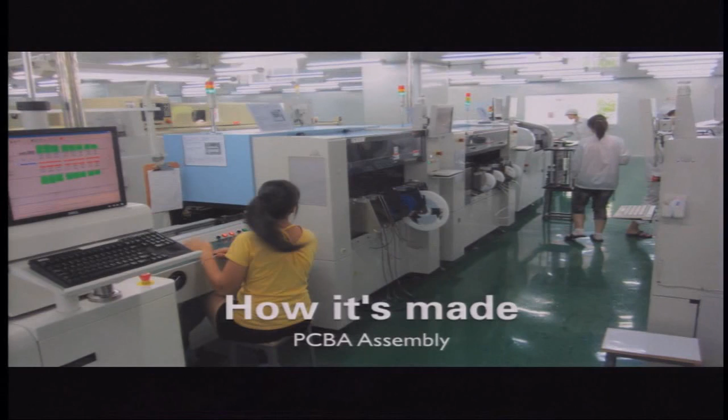So let me show you this. The very first thing we do is make our PCBs. You start by covering your PCBs with solder paste. This is an SMT machine that can automatically pick and place all of the components—the wireless chips, resistors, capacitors. After the components are placed, they'll be passed through an oven.

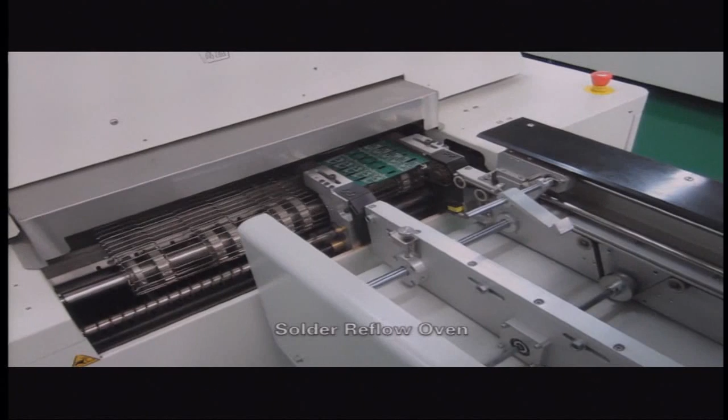Not every component on the board can be automatically placed, so we actually have to hand solder a few different things. In that case, that was our encoders for the motors.

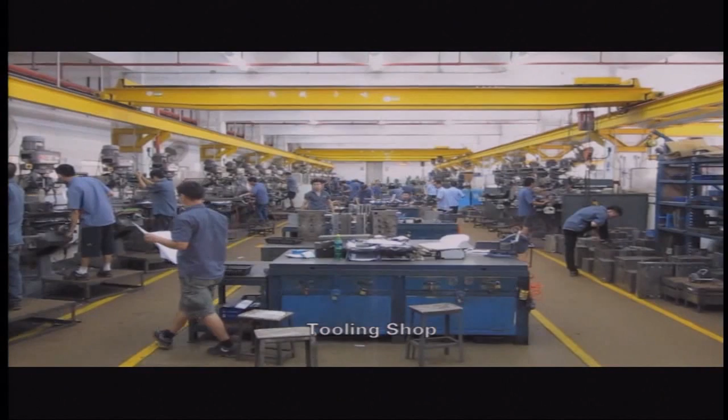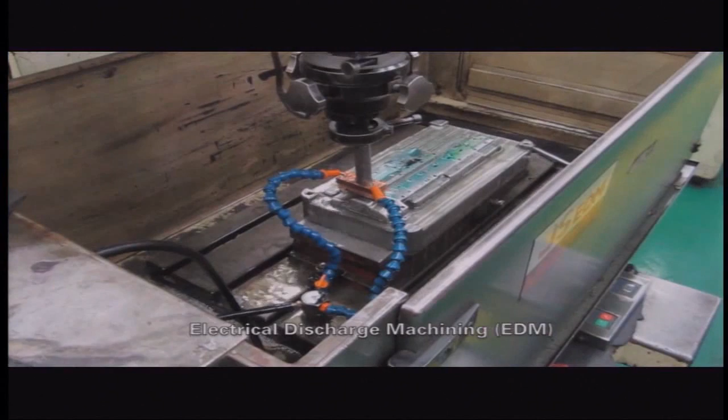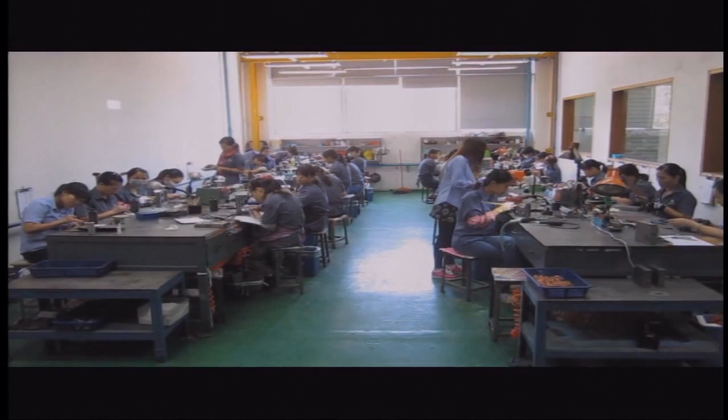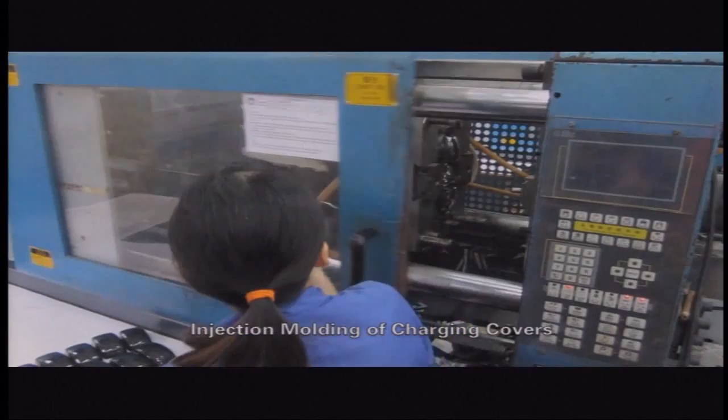These are tools. We use tools to do all the injection molding of our plastics. You create these tools usually by CNC machining or using an EDM process on some of the tougher materials. You carve these molds typically out of hardened steel, and there's also a lot of hand polishing that goes into that. Once you have the molds, you can put them in a very, very high pressure injection molding machine. In this case, these are little charging covers for the vehicles.

This is our tires—you'll see the tires pop out here. These are multi-cavity tools, so you see there was about 8 that popped out.

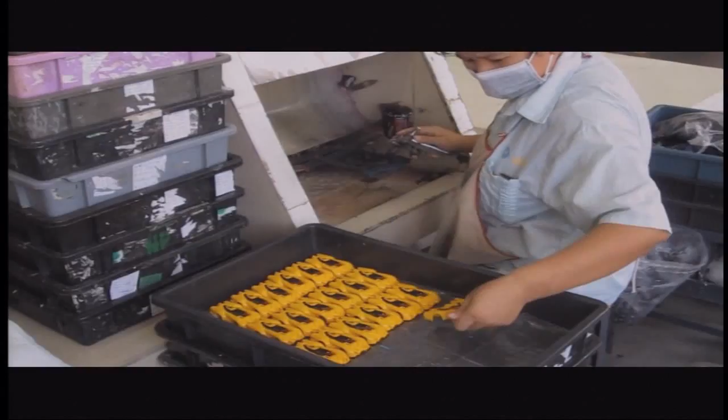This is an assembly line for one car. There are 45 different paint steps for each of these vehicles. We paint every one by hand. Now the assembly line, once again, there's about 45 people on this line. We've had to design all of these individual test fixtures and assembly fixtures.

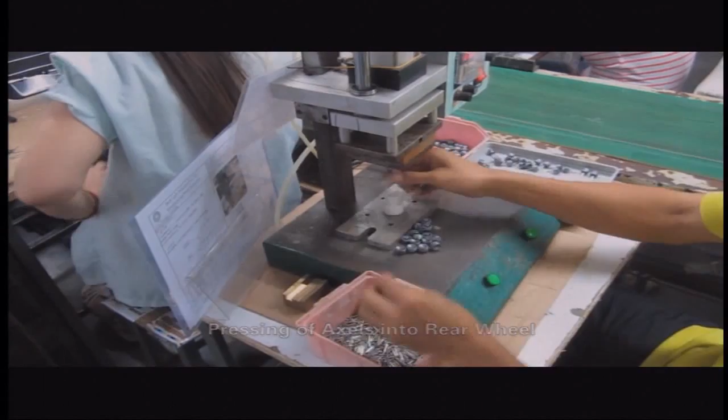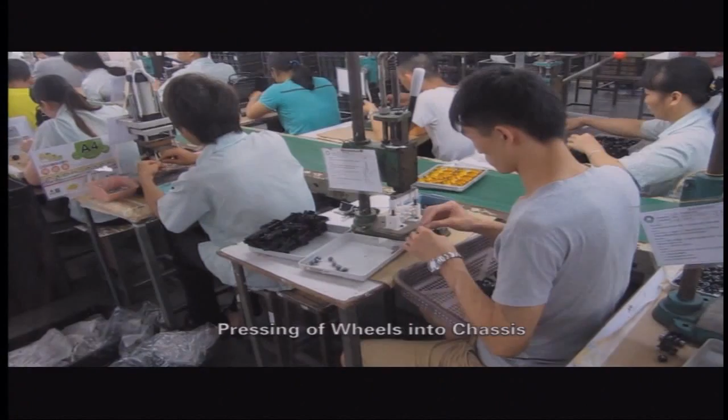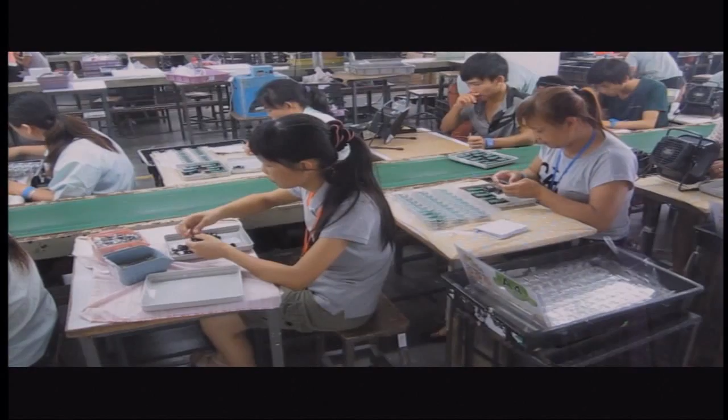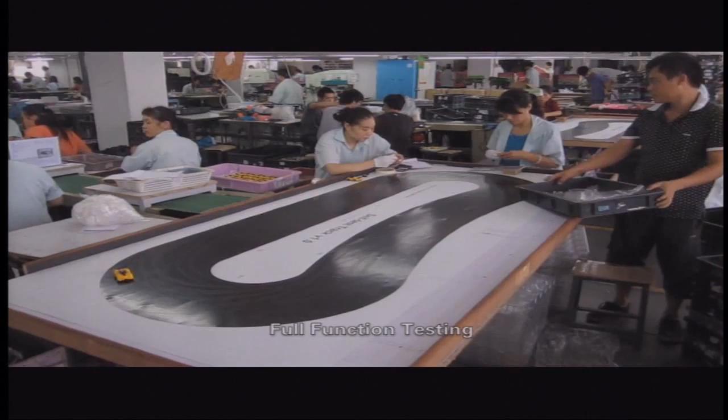Now imagine that there is error that can occur at every single step. So in mass production, largely what you're doing is variance control—your error can propagate over time. So you have to make sure there are constant test steps along the way. Any one of these things is a failure point. And one of the things we do is functional testing: at the end of our production line, we have every single car driving.

It's very, very important to know what date your robot was manufactured and what production line it came from, in case there are problems that come up in the field. You can then trace it back, and we collect a lot of data, so if there's a failure, we can figure out what's going on.

This is the final pack out, and then everything's put into boxes. Those boxes go into crates. The crates go into shipping containers. The shipping containers get sent overseas into the U.S. We bring them in and put them into our distribution center, and then they go to physical retail stores.

Very excited that after many, many years of work, Anki Drive will be available in a few short weeks in all of the Apple retail stores in North America.

So let me share with you a couple of lessons I've learned in the last few years. Mass production is definitely hard. Just watching that, you can see it takes 100 people to make what looks like a pretty simple vehicle.

So the bad news is that it costs a lot more than you think. You might carve a mold for a tool, and then you realize that your tolerances are off, and then you have to throw it out and potentially start again. There's so many things that pop up, and you're constantly finding errors you have to track down.

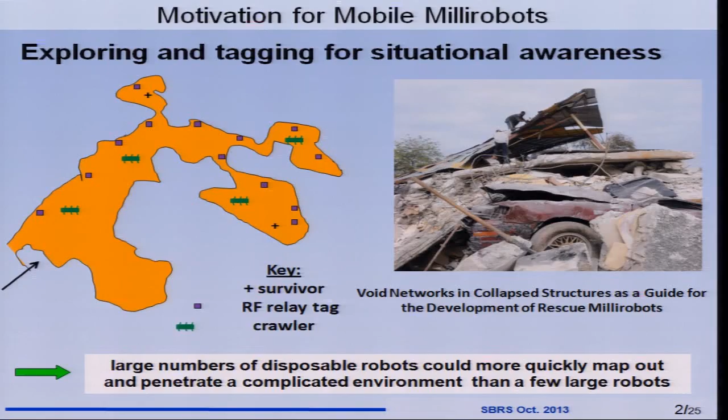So we're motivated by making very, very small robots that will be highly agile and able to go into really complicated terrain that big robots can't go into, and we want to make them very cheap and disposable. So in case they fail in their mission, we're not going to worry about it because they're going to be disposable.

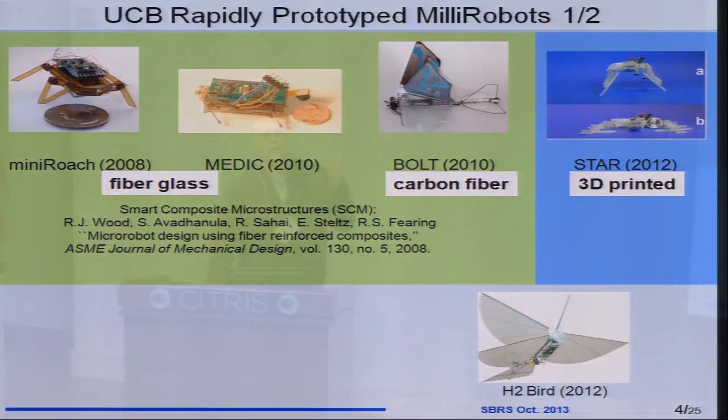So I'll show you some of the things we're doing. We've got a lot of work in production engineering to be able to make these small robots. I'll go briefly over how we make them. Make them fiberglass, carbon fiber, fiberboard. Typically in the size range here, they're palm size now, thumb size to palm size. A bunch of crawling robots and flying robots. I'll tell you about those.

Okay, so we started. One of our first crawling robots was this 2.4 gram crawler. This is made of laser cut fiberglass, folded together. At the time, it was one of the smallest legged autonomous robots. Got kind of limited capability running with shape memory alloy.

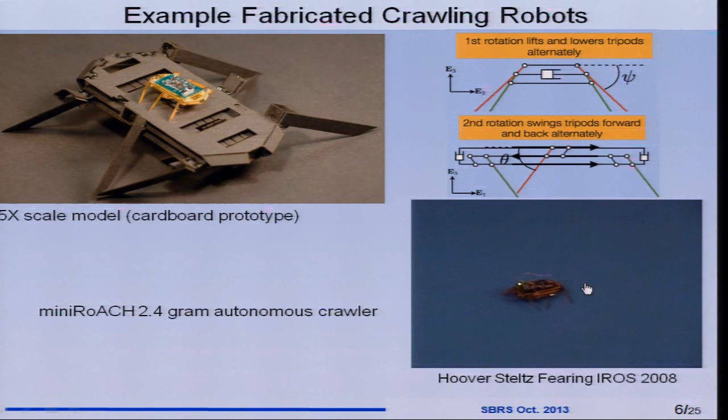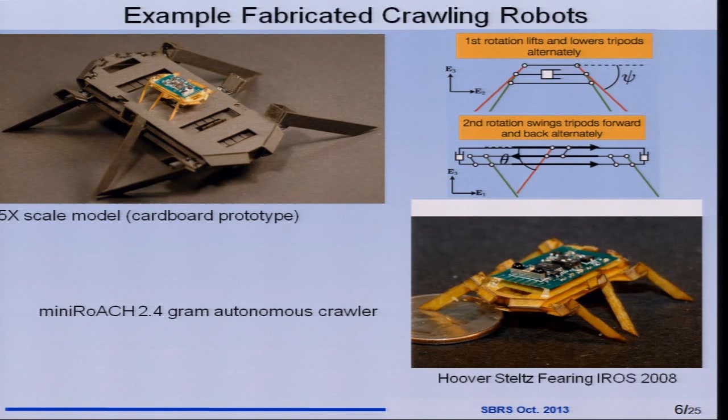We've kind of moved on to higher performance machines, going up a little bit larger. But I would say one of the interesting things here, you can see that the scale, just by changing a design parameter, maybe changing material, this design scales an order of magnitude pretty easily. Probably goes from a size range of about a tenth of a gram up to 100 grams. So pretty good size range, about 3 orders of magnitude in weight.

Still working on that. I want to check that out. Okay.

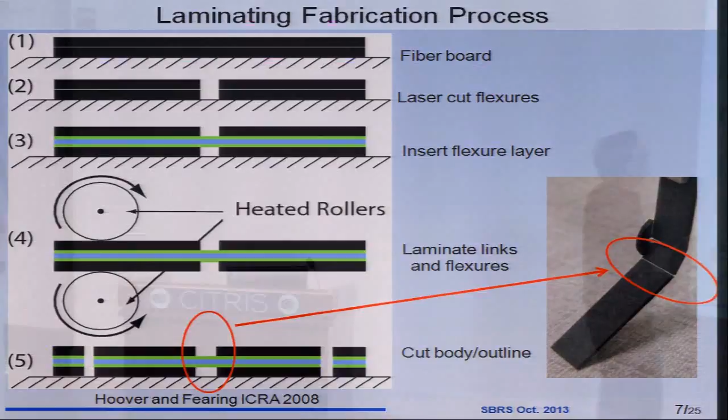So probably didn't hear anything I said, but you saw the pictures. Okay, so our process is actually pretty simple. We take a laminated process and laser cut. The laser cuts form a joint. The manufacturing is the easy part. Actually, the design is the hard part. That's still a pretty interesting open question. How you go from a conceptual design like this to a full design like this.

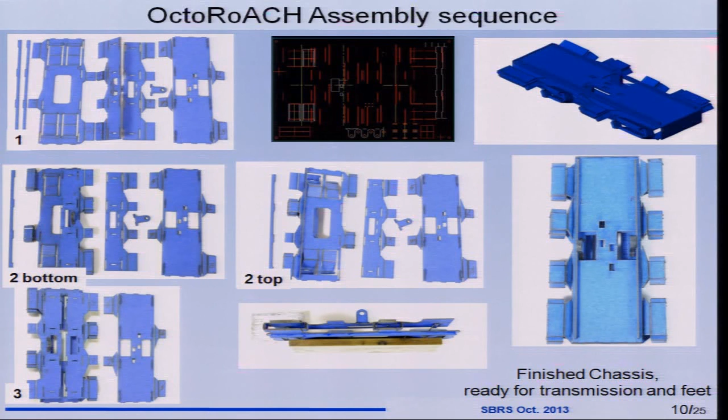This is Andrew Pullin's robot, and it's done with basically a flat planar layout. You get these parts that are laser cut. They incorporate both the joints and the structure, and this goes through the process here. Here's the full design, starting with the various pieces of the chassis, top and bottom. They're folded, combined together, and finally you end up with a complete chassis. And there's your robot. This is a robot minimally actuated, one motor for the left side, one for the right side.

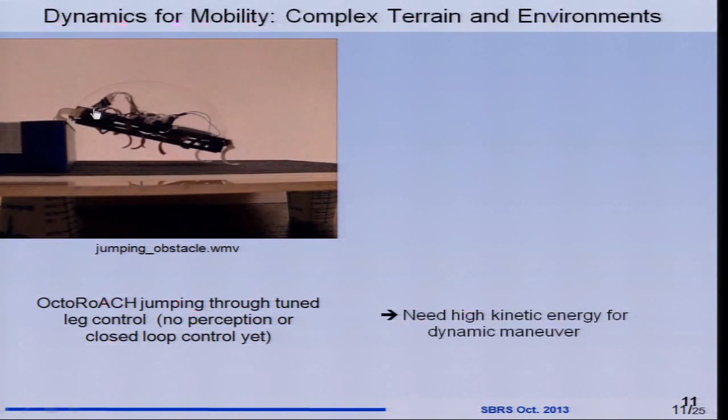It's not the most complicated robot, but we start to see you can get some pretty interesting behavior out of it. They've got a very high power to weight ratio because they're a very lightweight structure, and because it's minimally actuated, most of the time the motors are running, they're providing useful work for you, and so it can be pretty dynamic. So we think the dynamics is going to be really interesting for these small robots to give them mobility, and it'll get there.

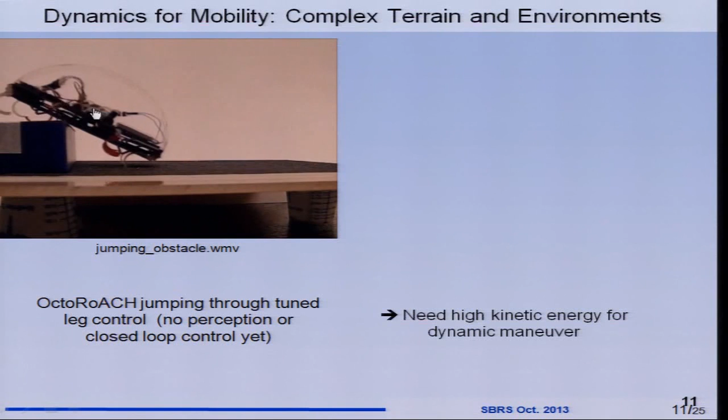It'll get there. Okay. Well, it really wants to get up there. Okay, there you go. There you go. So it made it. Oh, that's some problem at the other side, but it got up there.

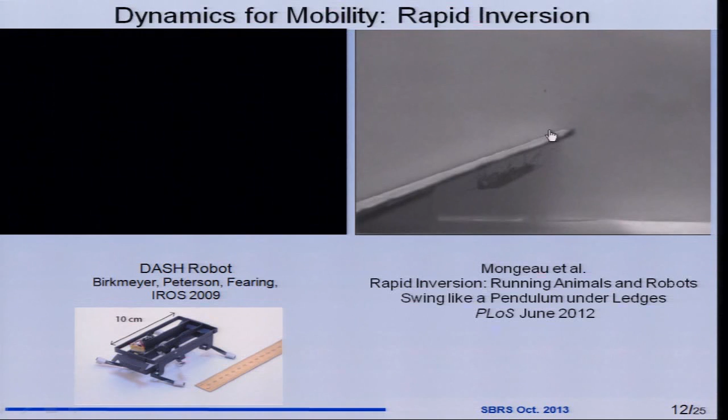So we're really inspired by the amazing capabilities of animals. Worked very closely with Bob Full. The example here is a really interesting escape behavior. The animal gets to the end of this ledge, and it just swings around, uses its kinetic energy to carry it through. And so we're really interested in, well, how do we understand that, and how do we capture that?

And we can do similar things with our robots. They just catch at the end, and the forward momentum causes them to rotate around. Okay, so dynamics is really important. We think the more dynamics, the better.

But you have to worry about sometimes things get too dynamic—how do you control all this energy you're putting into the system? Here we've got a robot with a roll instability, so the control issue has to come in. One way to take care of this is with a wing structure.

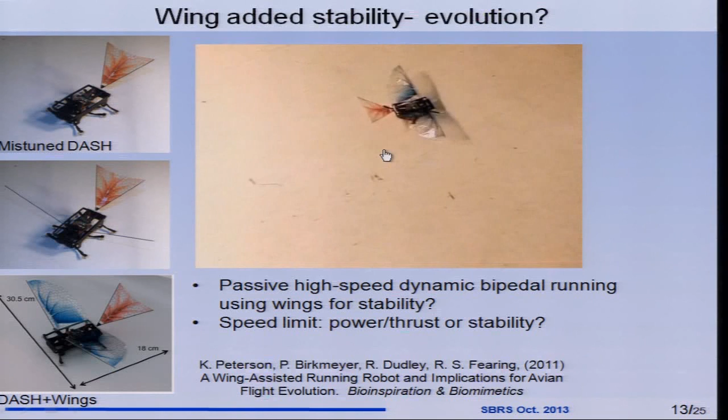The wings are providing both forward thrust and some damping moment. The wings don't actually need to be moving, because as the robot is running fast enough, it's generating its own drag forces, and these drag forces provide stabilization. You can see here in Duncan Haldane's Velociroach robot, these passive wings on the side aren't moving, but they're providing a stabilization drag.

The speed on this robot was limited by the stability. Without the damping of the wings, it would roll over like you saw on the previous slide. But this robot will run at 2.7 meters a second, and until last week we were tied for second fastest legged robot, but now we've slipped to third because of the Wildcat. So this is the third fastest legged robot in absolute terms at 2.7 meters a second.

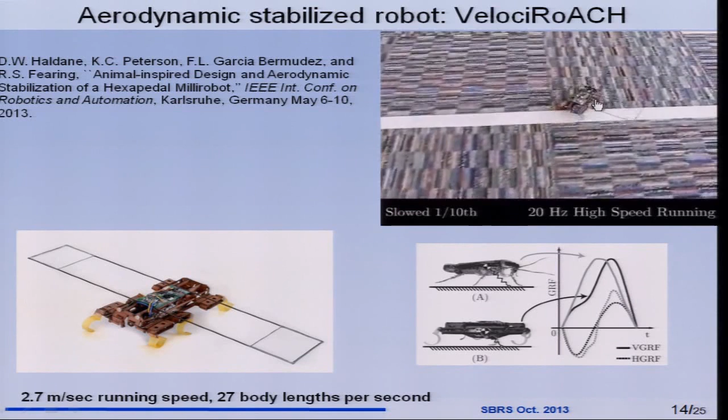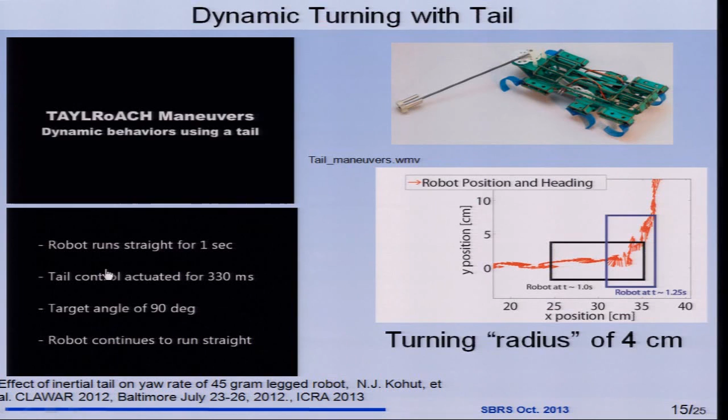Okay, so that's running—running's an important capability. We also want to be able to maneuver. Maneuverability is going to be limited by the traction forces you can get with your feet. If you're trying to run on ice or other slippery surfaces, it's going to be really hard to turn.

How many minutes do I have left? Three minutes. Okay, we're in good shape there.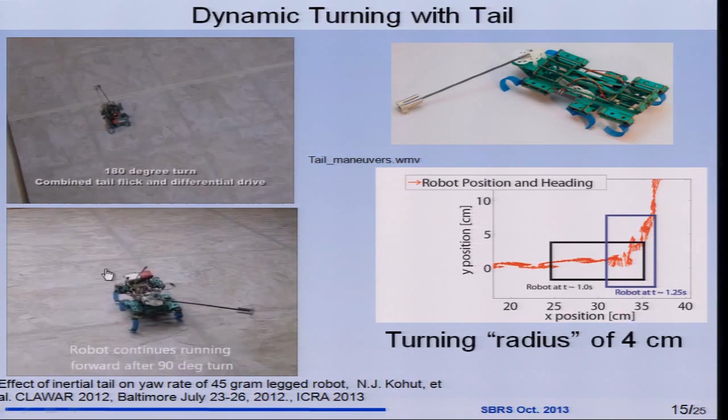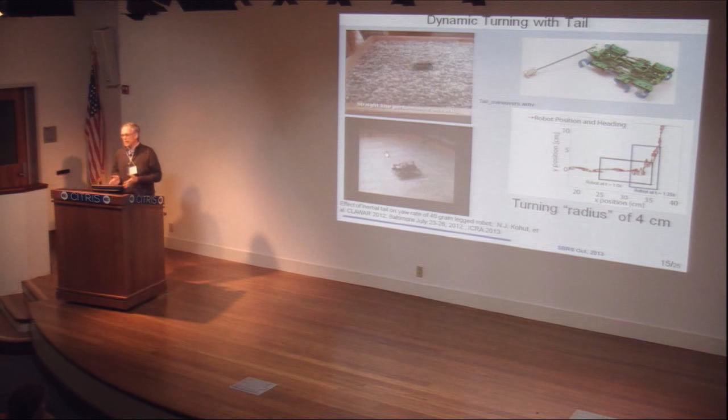One way to get really high turning moments is to put a tail on the robot and use the dynamics and inertial forces generated by the tail to get the rotation. This is work by Nick, who's now working with Mark Cutkosky at Stanford. You can see we get a turning radius now of 4 centimeters. If you looked at the traction forces required on the ground to cause that turn to happen at that speed, it wouldn't happen—so it's being caused by the tail.

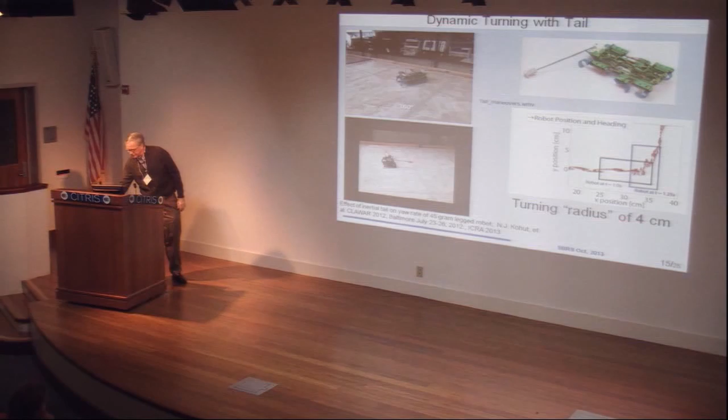And you can put a servo around the tail so you can stabilize it with a gyro and control your heading.

Coming back to aerodynamics—we can turn with inertia forces, but you can also turn with aerodynamic forces. Nick's going to present this at IROS next month. It's running, and the tail is going from one side to the other, and there's enough drag force generated by that tail to cause it to rotate one side or the other. We also did the control case where if you take the tail with no aerodynamic surface on it, it won't turn anywhere near as well. So it's turning by just the rudder effect of the tail.

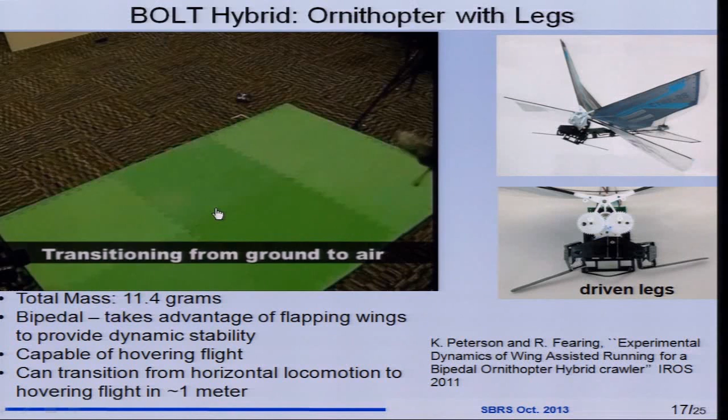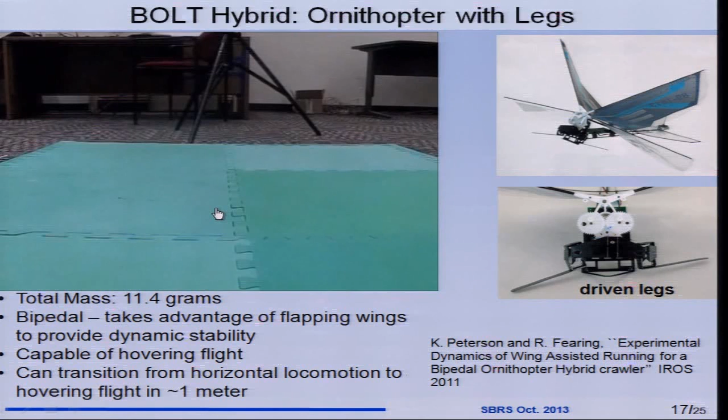Flying is very expensive—it takes a lot of power. So if you've got the opportunity to use your legs, that'll be more efficient and give you better endurance. Sometimes you have big obstacles though, so you need to be able to climb up with the wings.

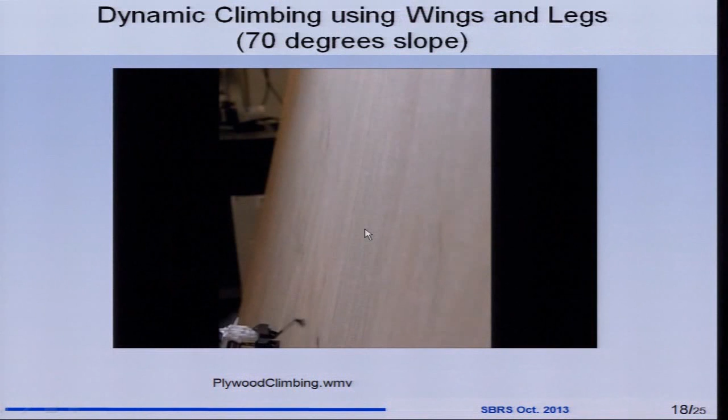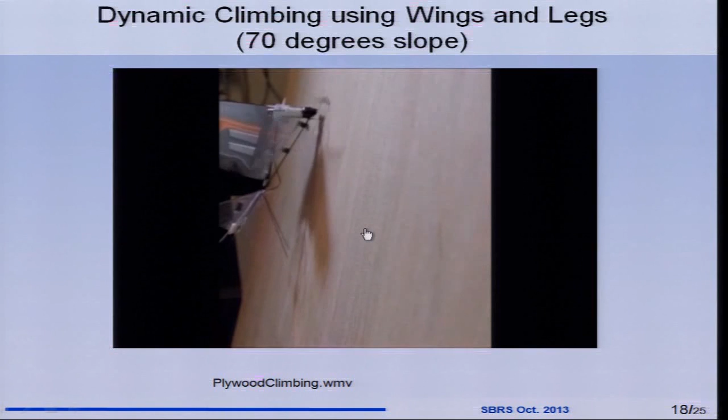Here, coming up a 70-degree slope, if you look closely in the picture there, you'll see that normally when you're running along on the ground, you don't lose contact with the ground. But here, running up the wall, you lose contact, and the wings will force you back into the wall so you can maintain the running.

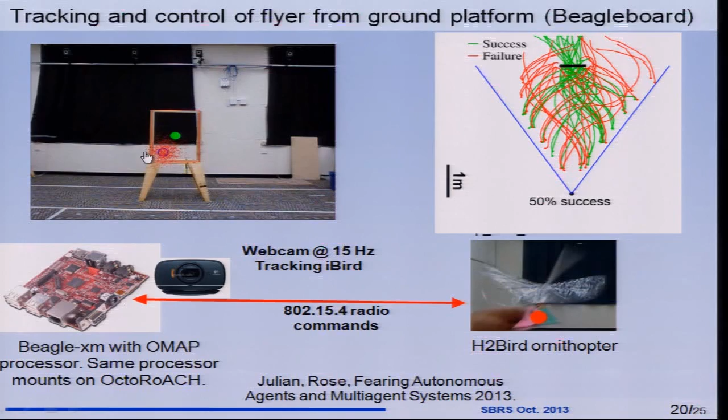Okay, running out of time. One of the things we're interested in is multiple robot control, so you can distribute the intelligence among the different robots. The flying robots are about 13 grams—they really, even today, can't carry much processing capability, mainly because of the power requirement. So you can distribute the intelligence and have one mobile robot that's looking at the flying robot and telling it where to go.

Okay, back to climbing. We're very interested in this concept of all-terrain mobility—something as capable as an animal is of climbing, whether it's a floor, a wall, or a ceiling. To do that, we have to understand how we adhere to surfaces. So we've got a lot of interest in understanding adhesion, again working with Bob Full on coming up with ways to build adhesive mechanisms that run at very high speeds.

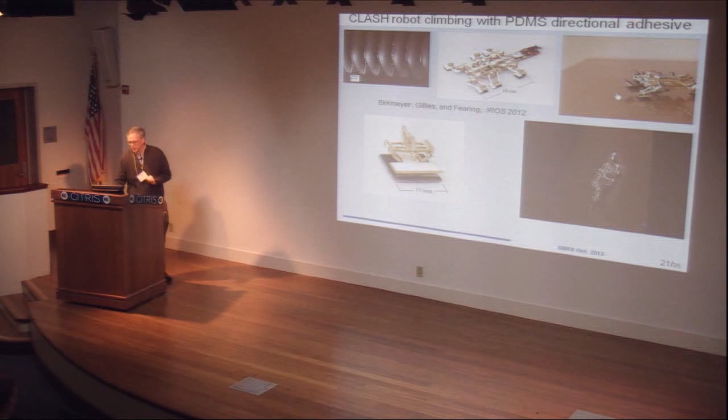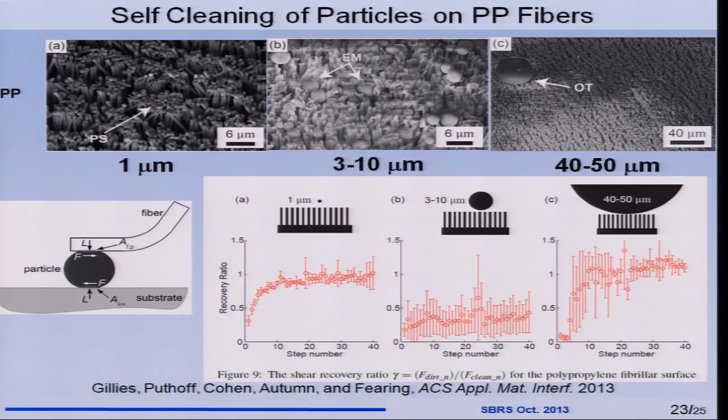These legs are going at about 20 hertz, and we want to be able to work in dirty environments—that's actually the limitation. There are a lot of great adhesives out there, but how do you climb in a normal environment where it's covered with dirt? The typical adhesive material is very soft, and it gets all cluttered with dirt. So we're working on special new types of adhesives.

Polymers, they get dirty. After you take steps, they clean up. So, in conclusion, this is where I want to be able to build a robot that's as capable as a squirrel, to keep us busy for the next 20 years.

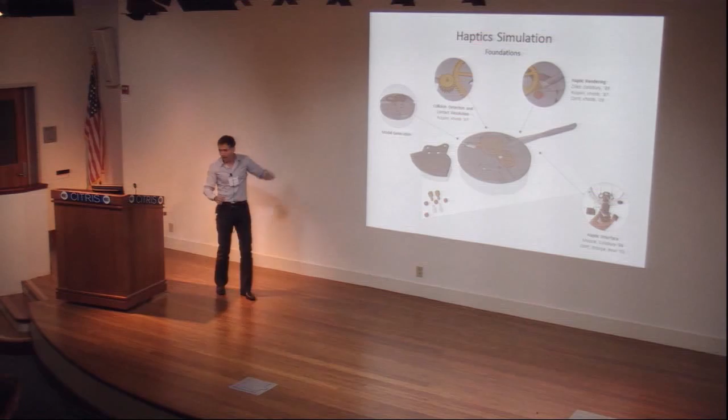We're very interested in taking those parts and having them interact together, collide, not just penetrate or intersect. This means looking at collision and possibly adding some dynamics. The haptics idea is to take those parts using a haptic device—a small robot that can recreate forces in your hand—and control the different parts in the environment, as if doing a virtual assembly.

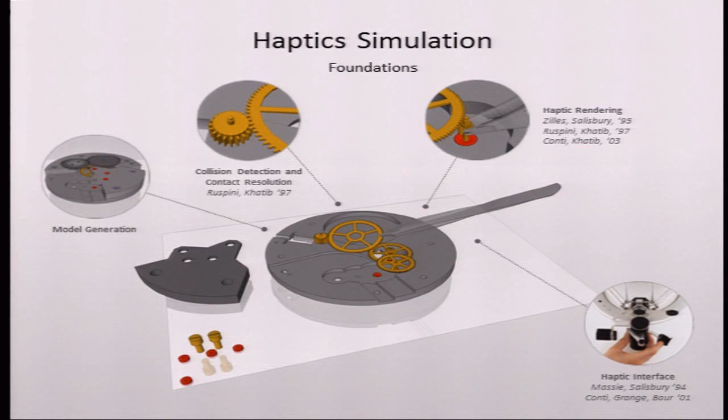From there, what I want to show you is: if you want to create a simulation like this, what do you actually need? Some of the work has focused a lot on haptic devices.

Going back, if you want to look at when haptic devices really started, we can go back to the 50s, when we began building telemanipulators. But it's much later, in the 90s, when Silicon Graphics came up with computers that allowed us to do 3D computer animation and 3D imaging, that we could really start to combine haptics with simulation. The devices have improved a lot in recent years.

We no longer just do point contact haptics, where you take a finger and touch a surface. We now have the ability to feel torques, forces in rotation, forces in translation, and even grasping. This opens up some interesting capabilities, where we now have to revisit the whole haptic simulation framework.

What are the algorithms we're going to use? It's not just single point contact—we want to take complicated parts and bring them into contact together. This means we'll have not one, but tens or hundreds of contact points, so we'll have to come up with ways to very efficiently compute those forces.

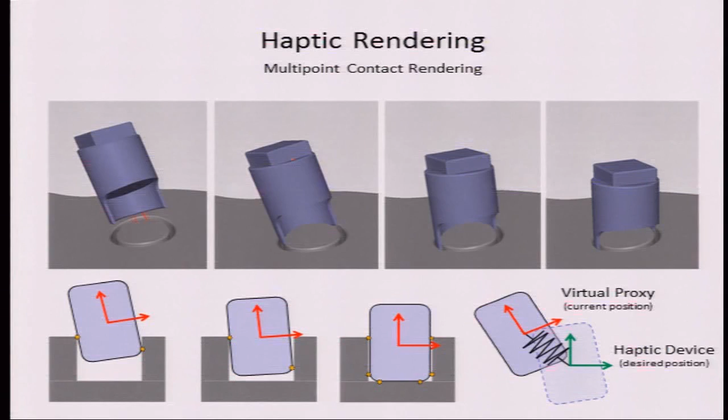One of the biggest challenges in haptics is solving the problem of collision detection. In computer animation, you need about 20 to 50 frames a second for good animation. But to get good haptic rendering, you need an update rate of 1,000 times a second. So there's no shortcut.

You have to compute those collisions very fast. So what we've done is revisited a lot of the work done in computational geometry and parallelized this on computer graphic cards.

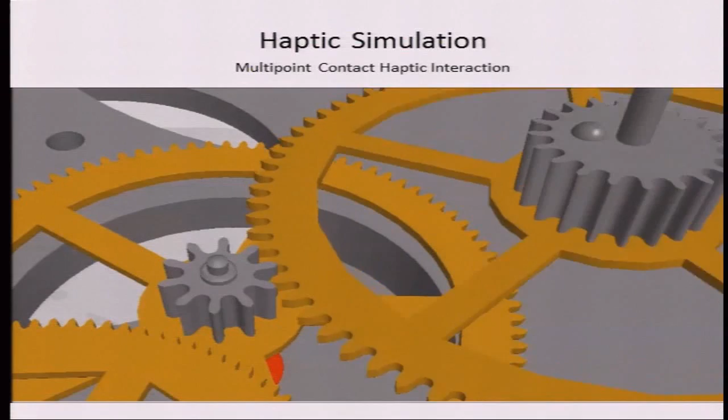This is to show you a bit of the result of what we're doing today. We're now able, with those haptic devices, to take complicated parts that come straight off a CAD tool, like SolidWorks, and import them. Those tools have tens, 100,000 polygons each. You can now compute those interactions in real time.

You're feeling them as you assemble them. So you can kind of create very intuitive interfaces to interact with those environments.

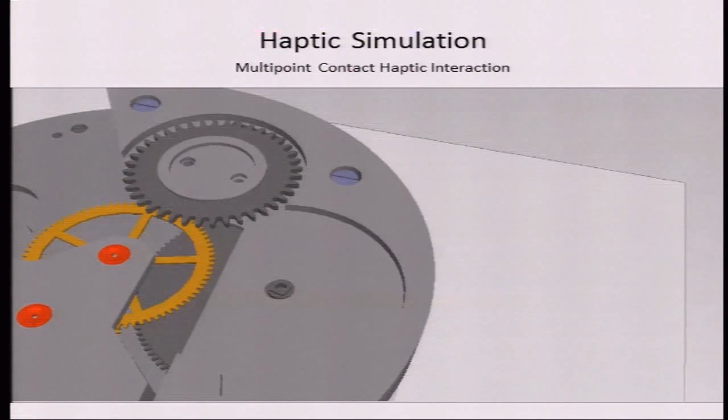Here again, taking apart, doing an insertion. So you're feeling compliance as you are interacting. You feel every tooth of the gears. You can line up parts, center them. Here's a slightly more tricky part where you've got a small rectangle, modeling screws, and so on.

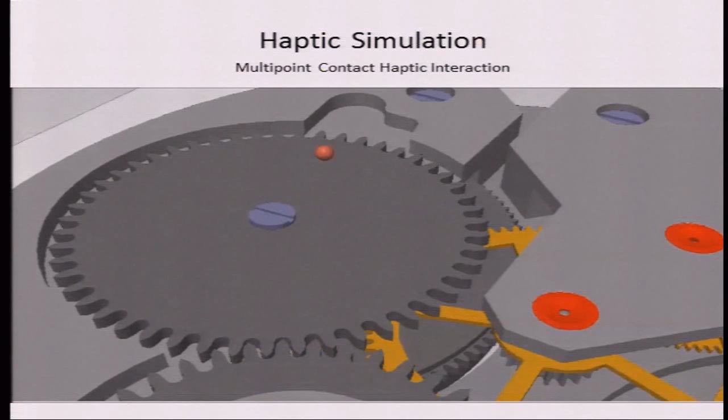And so where we're really wanting to go with this, as we're zooming out, is coming up with new tools.

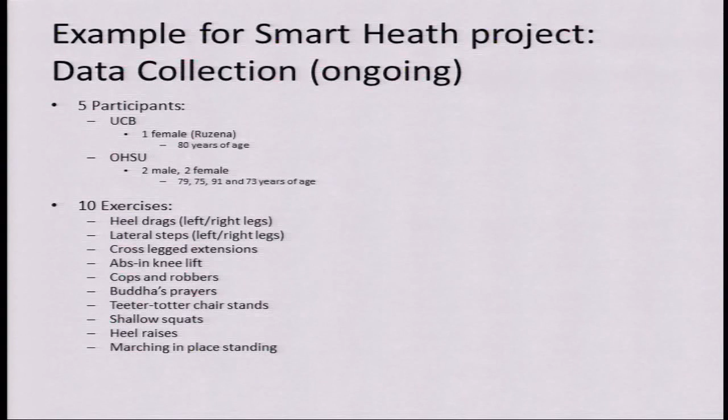So this is one example from several of our ongoing projects—a health project data collection. What we have here is 10 exercises, each repeated 10 times, and you can see the list of exercises.

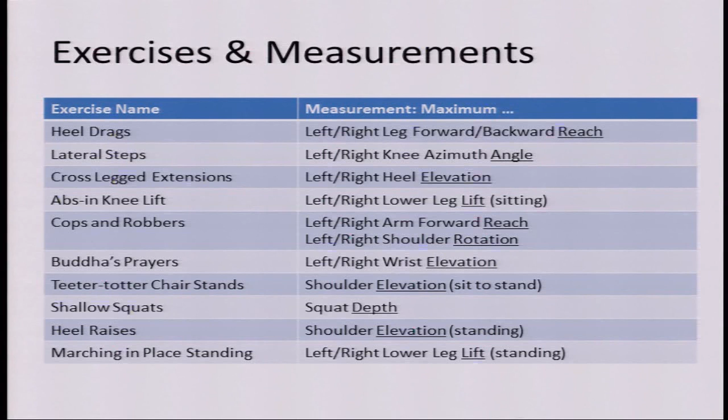Each exercise emphasizes a different part of the human body—heel drags, reach exercises, lateral steps, angle, cross leg, etc.

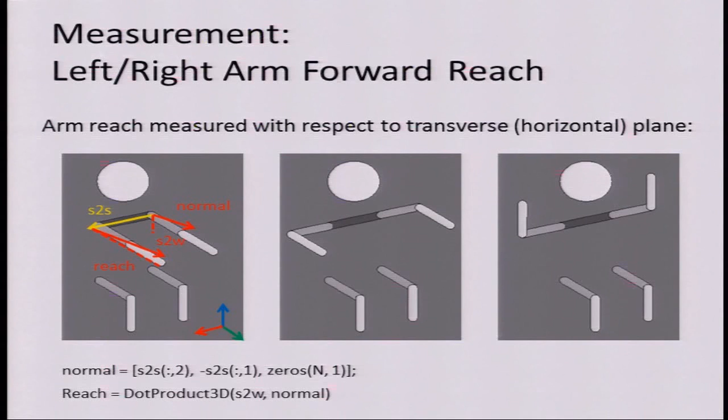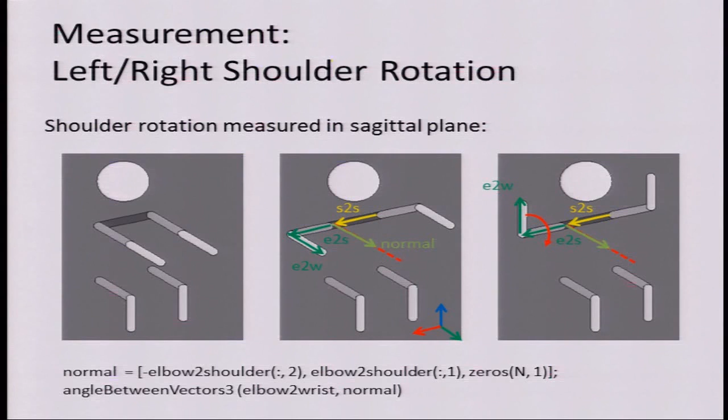The angular changes, and apply all your knowledge from robotics to this problem, evaluating in more detail than people have done so far. Here is the arm reach measured with respect to the transverse horizontal plane, and here is shoulder rotation measured in the sagittal plane. You can do the same thing for your legs, and so forth.

So we can do more detailed measurements. And so what are the lessons we've learned thus far?

Limitations of the imaging technology—the new Kinect presumably will be a bit better and more accurate, but there are requirements on household space. The Kinect right now requires about 4 meters of space from the camera where you are doing the exercise, and we found that not every elderly person has such an apartment.

The video presentation and the choice of exercise, in terms of interfaces and feedback, is still an open problem. For those of you who are students here looking for a PhD challenge, this is it—how to model the feedback, which must be simple; how to recruit many subjects; how to organize the database.

Measurement difficulties—we do not have direct access to measuring the axis intersection on the human body. For example, some biomechanics folks drill a hole in order to get the actual axis. You can't do that here.

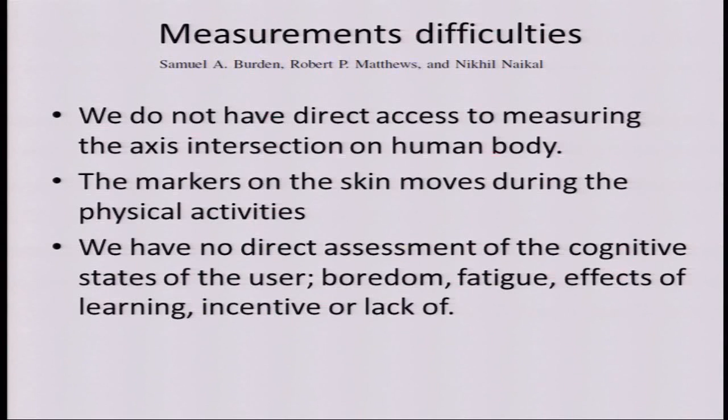I can't tell you everything, but anyway, conclusions: working with people is hard. The problem is important because my generation is growing, as you know from all the statistics. So the opportunities to help that generation live independently and meaningfully are here, and technology can help. But as I said, the problem is hard.

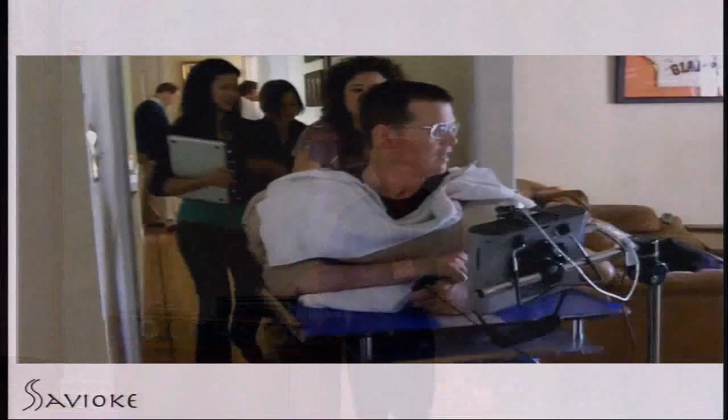Probably the most exciting thing that happened out of that was this project we called Robots for Humanity, which was a demonstration of using a service robot to help somebody. If you think about older adults and the problems we're going to see in the future, here's a guy who...

At age 40 he had a stroke and became quadriplegic. He had been the CFO of a Silicon Valley company, and suddenly he can't speak, he can't move hardly at all—he can only move his head and a little bit of motion in one arm. With that, he's kind of stuck. I mean, that's sort of the extreme of disabilities.

He sees a PR2 on TV and says, wait, that can be my body, and asks us to build him an interface. Long story short, we build him an interface so he can start to play with the robot. Now it's a great story.

It's a heartwarming story. The first thing he wants to do when he gets the robot is turn it on himself, which is scary, and scratch his itch. He wants to scratch an itch for the first time in 10 years.

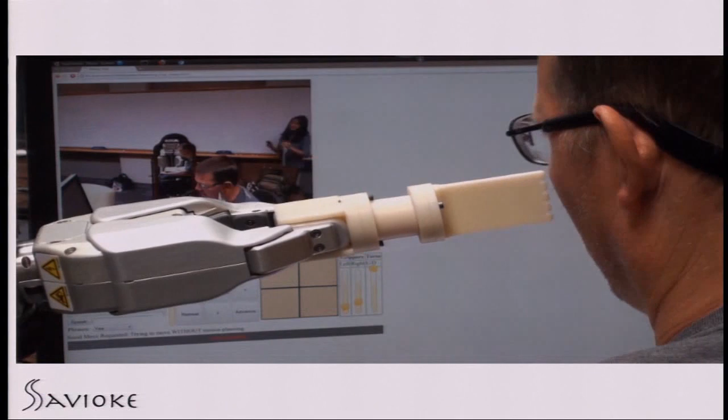That's really cool. He's used it—we've had the robot at his house. He's gone across his house to a drawer, opened it up, gotten out a towel, brought it back, wiped his face with the towel, and so forth.

He actually shaved Charlie Kemp of Georgia Tech. Charlie was in Atlanta, he was in Palo Alto, and he shaved Charlie remotely using Charlie's PR2. So lots and lots of cool stuff, right?

Except for one big problem: that's a $400,000 robot. Henry can't have his own robot. Nobody else like Henry can get one of these robots, and that's just not a good situation.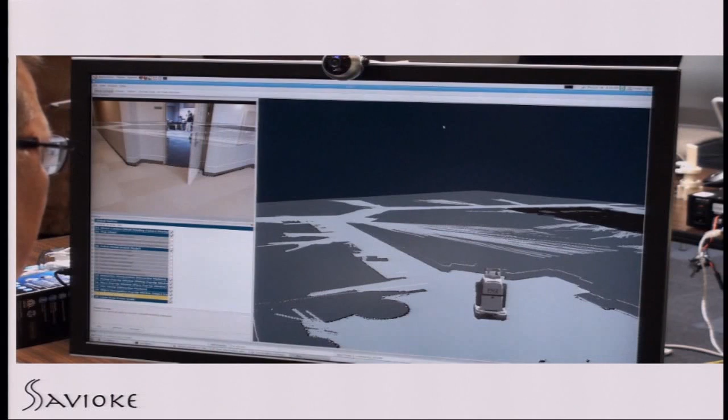So for the last 2 or 3 years at Willow, and now going forward with Savioke, I've been on kind of a quest to build robots that can help people at a much more affordable cost.

If you look at just Willow Garage and what happened, Willow Garage had a bunch of spin-offs over the last 2.5 to 3 years. The top 3 actually have products out or are in exit, as we say in Silicon Valley, in a good way.

It's funny, I see Melonee's here—Unbounded, when I first made this slide, came up in white text since they're still in stealth mode, so that was appropriate, but I turned it black so you could see. I think there's going to be a talk later from hiDOF, and a third one, I think we have a talk from OSRF. So a bunch of spin-off companies came out of Willow Garage, and I'm really, really proud of that.

But for a couple minutes I want to talk to you about where I see Savioke going, how I think we can impact the world of service robotics, and why the time for that is right now. One important lesson from Willow Garage, thinking of it as a retrospective...

Over those 6.5 years, one of the things we did was focus on open source. Open source has some really interesting and maybe unexpected powers. The biggest one is it gives you an incredible recruiting advantage—when you're a graduate student going off to work at a company for the summer, wanting to do an internship...

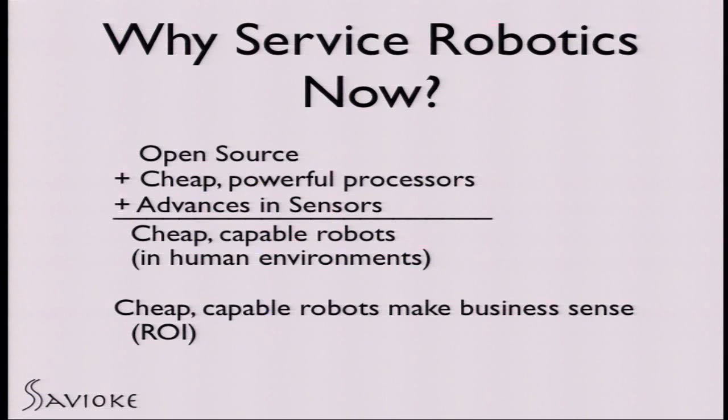And all that is thousands of dollars worth of mechanism in order to get you a 3D view of the world. And somehow, PrimeSense in Israel plus Microsoft are able to get that down to a $150 package, which makes a huge difference in terms of what you can do in a robot and the cost that robot's going to be.

And that hasn't ended. The Kinect is not the end of that story, it's the beginning. Those sensors are getting better and cheaper, and the software to go with them is getting better too. So what all that adds up to is cheap and capable robots in human environments.

The important thing is, cheap capable robots make business sense. Why do I care about business? I started with a humanitarian story about service, about helping people. I care about business because at Willow Garage, I could afford to give Henry a PR2 robot, $400,000. I could give Henry and a few of his friends one, and that's it, that's the end of the world. That's the amount of impact you can have. If you can't sell the product, you can't scale it up. You've got to make something valuable enough that people can afford to buy it.

Once you get the cost down, there's a huge step function. If you take a $400,000 robot and figure out its hourly cost, based on assumptions about its lifespan, you're talking about a robot that costs something like $70 an hour. You can hire a lot of people for $70 an hour, and they're a lot less clumsy than a PR2. But if you get a robot down around $20,000 or $30,000, suddenly you've got something interesting, because you can't necessarily afford to put a person in to fix it. And if you put it into a job that's mundane, boring, dirty, dull, and dangerous, suddenly you've got a recipe for something really successful.

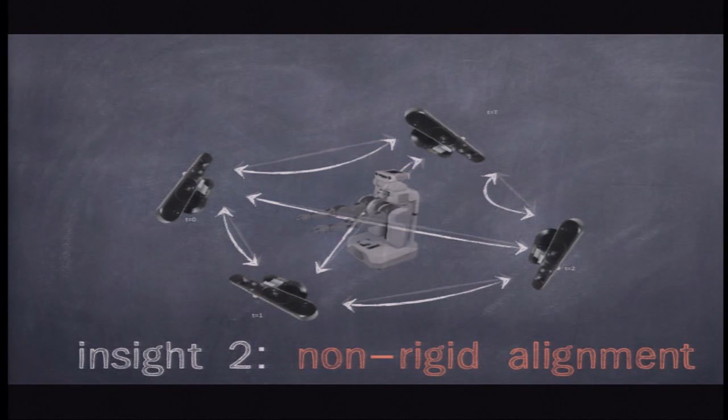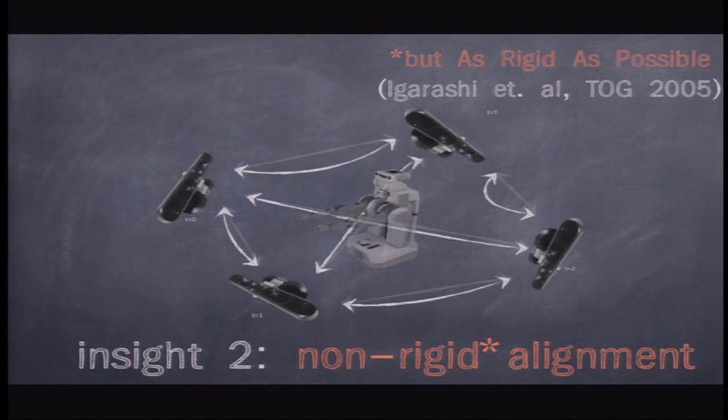So our paper's first insight, which seems pretty obvious if you have an online method, is to add loop closure links. So now instead of just doing this pairwise alignment, add links in between and do a graph optimization. The second insight is to use a non-rigid alignment to try to actually warp these things into shape, correct for the fact that the data is not perfect coming in. But we'd like to keep it as rigid as possible, and that's from a graphics paper from about 10 years ago. So that's the very high-level idea.

I can't go into the math, of course, but I'll show you pictures instead. Instead of this, you can get something like this from the same data. And this is work done with Qian-Yi Zhou and Vladlen Koltun.

So to recap the main idea, Kinect Fusion gives you a nice smooth surface, but without loop closure, it's going to break. Calibrated data can help you a little bit—you can see here that even just not having as much of a warping helped it stay on track with this online approach.

But if you're willing to add loop closure links, you can get quite a bit better. The screen maybe isn't even high-res enough to see that there actually are breaks along the side, so this still is not a perfect reconstruction. And then if you add this non-rigid or elastic term, you can get something really nice and cohesive. And this was from walking around a couple times.

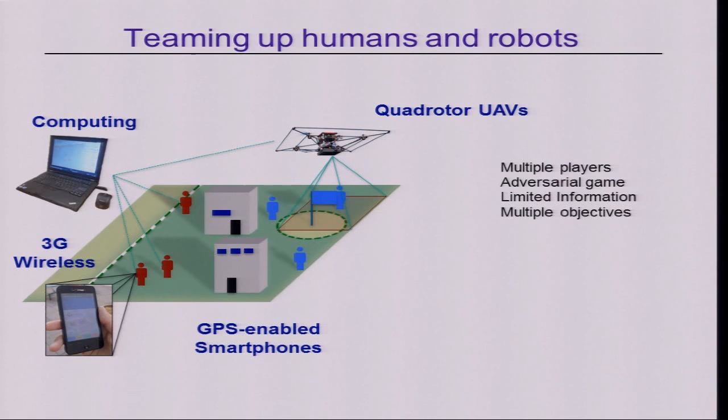So imagine teams now that are people and robots at the same time. The advantage here, our robots are quadrotors, is that the quadrotors can provide bird's eye views in areas, look at where the opposing team members are, look at where the flags might be, because that's unknown information to begin with. And it's an interesting problem—there's a lot of unobservability. These games are often played by undergraduates on university campuses, as I actually learned the game when I was a professor at Stanford from Stanford undergraduates.

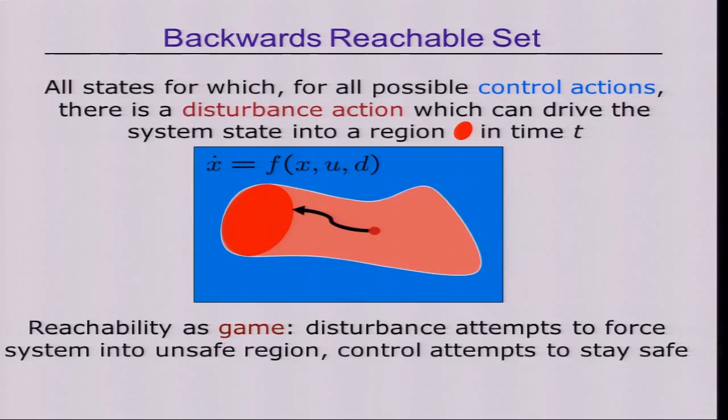One of the tools we've been designing for working on this problem is what we'll call a reachability tool, or a backwards reachable set. So instead of just thinking about games where we have teams of opposing players, we think more generally about a control system modeled by a differential equation, where there's a set of control inputs U and a set of disturbance inputs D. They're playing against each other, and you'd like to design a control that works in the face of worst-case disturbances.

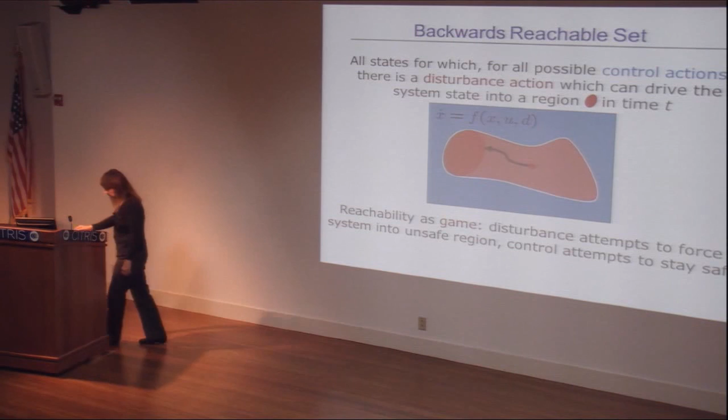That's how we frame these problems in a game theoretic context. So what we're computing here are all states for which, for all possible control actions, a disturbance D could push you into that unsafe region, that red region, in time t units. We can solve this problem, though it's typically computationally intensive, by solving an appropriate Hamilton-Jacobi equation.

We can turn the problem around, as if you want to achieve an objective in the face of worst-case disturbances. Here it's basically the same problem, but now the control is trying to get the system into that blue set in the face of worst-case disturbances. Then you can take these sets and do set calculus on them — you can look at the set of states which will reach one set while avoiding another. It's a very neat framework for dealing with constrained control problems where you have different disturbances and control inputs, and you'd like to solve these.

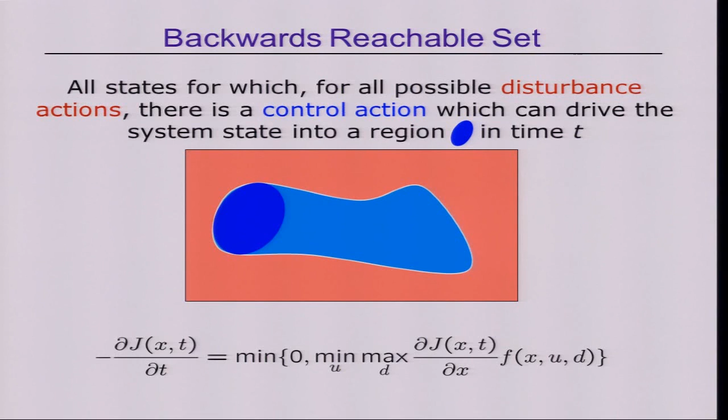We've also been thinking for a while about hybrid systems. Think about a hybrid system where you have continuous dynamics, but also a number of different modes the system could be in, say K modes. If you zoom in on one of those, you have the possibility of not only controlling the system through continuous inputs, but also hitting buttons or changing modes, which causes the system to switch behavior.

So we think about these sets as a kind of reach-avoid operator. We'd like to compute regions which reach one set while avoiding another set — and that other set could be a transition to a mode in another state space that you don't want the system to enter. So you get a beautiful interplay of continuous and discrete dynamics when you look at this kind of set calculus.

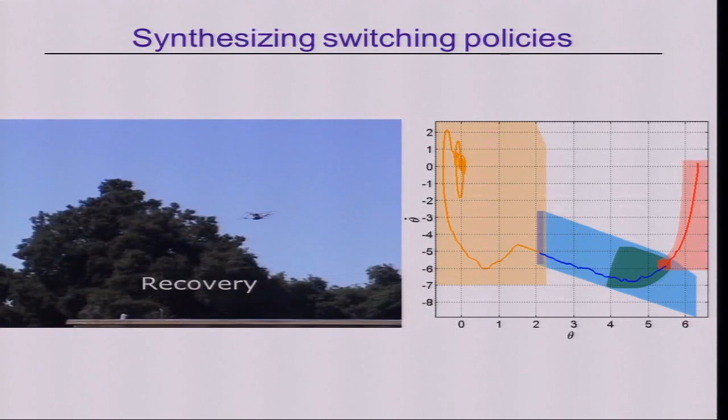One thing we did with our quadrotors, to demonstrate this on a single vehicle, is a high-performance flip maneuver where we ask the quadrotor to go through three different modes. First it climbs up, so in case we screw up it doesn't hit the ground quickly. It goes into an impulse mode, then quickly turns around into a drift mode where the rotors are switched off — that's when it's upside down — and then switches into a recovery mode. We use these sets to chain maneuvers like this together and actually synthesize switching policies.

Okay, back to capture the flag — this same methodology can be applied. We're looking here at a 2-player game, played in the plane, so there are 4 dimensions. We're just looking at control inputs, which are velocities, so we're computing 4-dimensional sets. What I'm showing here is a 2-dimensional projection of those.

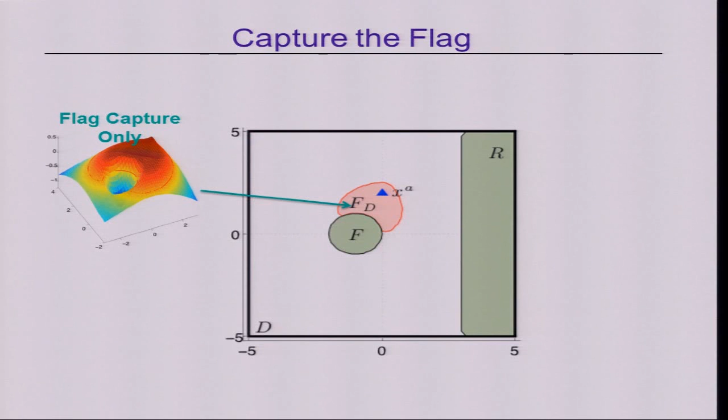We're fixing the attacker — the person trying to get the flag and come back — fixing his position, and asking what are the winning states of the defender. Those are the kinds of things we can compute. This is a 4D Hamilton-Jacobi equation, and we can compute that now in real time. So we can compute the region for capturing the flag F, and the region the defender has to be in to defend against returning back to the safe region.

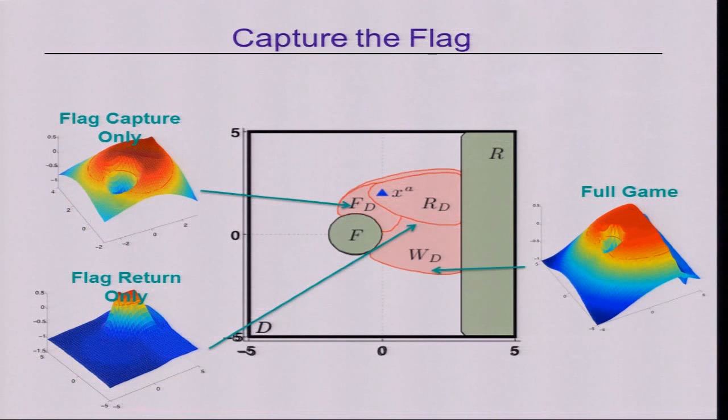We can compute the composite game, and we did this and applied it in the framework — this is without the quadrotor right now, in a scenario where we had people playing. This is on the Berkeley campus. We computed these sets and then displayed the information to the players, who were carrying smartphones, so you can see that.

You can see that this provides some kind of intuitive information. This is what's being displayed on the smartphone. These are the 2 players: the attacker who's got the flag, and the defender. This is the winning region for the defender, and the attacker's just got the flag and he's trying to go back to his safe region. So it's determined by the initial conditions here, because the defender is outside of his winning set initially.

So that tells us that if they both play, if the attacker plays his optimal strategy, then he'll be able to get to the safe return region. This is interesting though, so he gets to the return region. It's a little jumpy, you can see him saying, I won.

But you can use these sets now to do some interesting things. So we took the smartphone away from the defender and asked, this looks like kind of an easy game, what would a person just do naturally? Our attacker still had the smartphone, so he had access to the displayed information and the winning sets from that game. You can see that the defender initially started in a winning configuration.

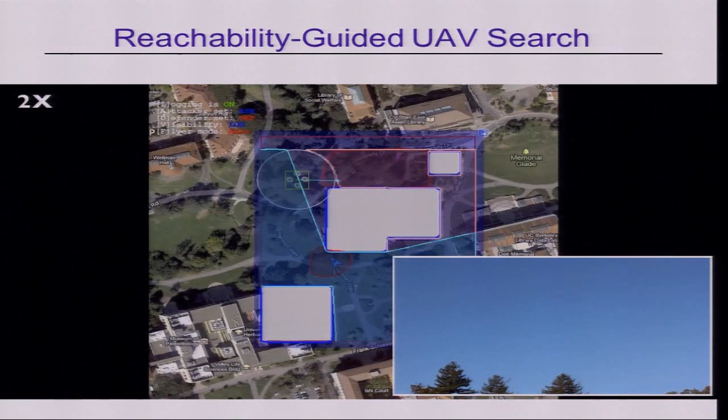Okay, so then finally, that was a two-player game going to multiplayer. What's interesting here is that once we have the 4D solution, we don't have to go up to any higher dimension. We can store that solution and then use it in a multiplayer game. So what we have is basically the same game, but we use a graph matching method to basically compute the worst case defender-attacker pairs and then solve the game for the defenders.

Okay, I think we're running out of time, so let me just conclude to say we've been spending quite a lot of time computing and using this reach-avoid operator for specifically what I showed was winning sets in dynamic games, but more generally we've been using them in control problems where the players are uncertainty or disturbances pitted against control.

Algorithmic development: the tools we developed are part of Ian Mitchell's thesis, and he's developed a level set toolbox. That was the sort of set calculus that I showed you. We are computing new methods for automating the reachability under switching and new methods for doing this in high dimensions. Currently, things we've been doing are combining this set calculus with machine learning to do high performance control within the reachable set. And also, as I mentioned at the beginning, trying to think about how to design automation which works well when you have control authority shared between people and automation.